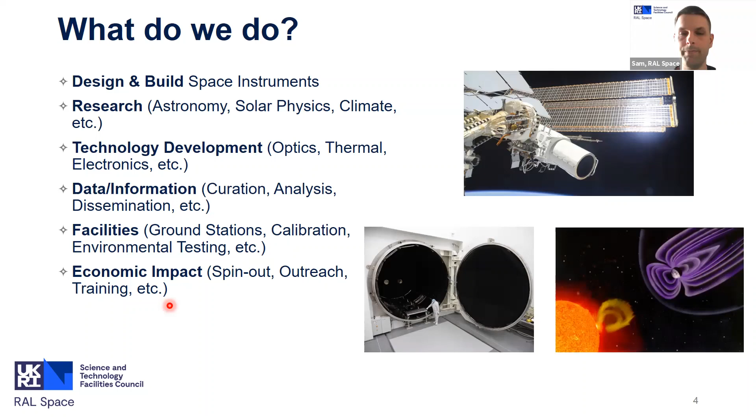Before I move on, I mentioned a few slides ago that we're currently building the National Satellite Test Facility, or the NSTF, so I thought it was worth adding a slide here to give a bit of context. It's a £105 million government investment that aims to provide the UK space industry with a one-stop shop for the complete environmental testing of spacecraft.

So this image, I think, is from earlier this year, of the building as it looks at the moment—this is the big new thermal test chamber that's just been added. I'll talk a bit more about that shortly, but really what this facility does is complement our existing facilities: larger scale thermal, vibration and shock test facilities, a brand new acoustic test facility, EMC facilities, antenna measurement, and also mass property measurement.

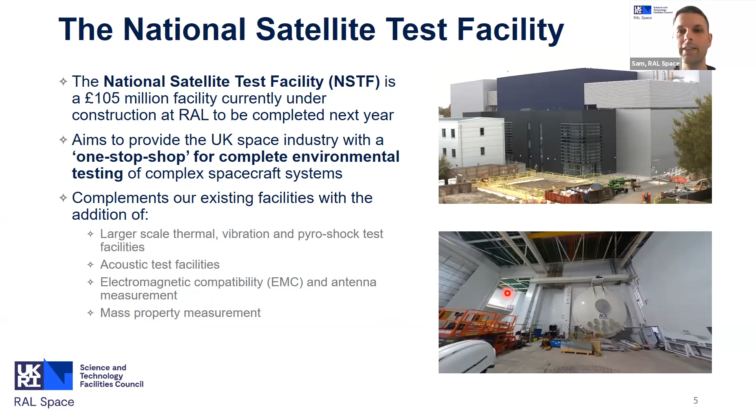So I'm going to talk a bit more about this later on, but just to introduce the NSTF and the fact that it's a really exciting time to be involved in the space industry in the UK.

So yeah, let's talk about testing then. Before we get onto the specifics, it's worth clarifying why this is important and why we care about testing. The key to understanding that is to consider the space environment.

It's probably quite an obvious statement, but without the Earth's atmosphere, we've got to withstand an incredibly hazardous environment in space. This obviously depends on the exact mission, the exact orbit, and the environment it's going to work in, but typically it has to be designed to withstand large mechanical loads—things like vibrations, acoustics, mechanical shocks.

And extremes of hot and cold temperatures. If we think about the International Space Station, which orbits the Earth roughly every 90 minutes, throughout its lifetime it experiences a series of incredibly sharp extremes of hot and cold that it's got to withstand.

And then there's a few other areas: intense radiation, microgravity, space debris. These are maybe things we wouldn't specifically test for in our big facilities, but we've got to make sure we design our spacecraft with these kinds of restrictions in mind. As engineers, our main concern is ensuring that everything we design and build is going to be able to both survive and, more importantly, operate to the required performance throughout the orbital lifetime.

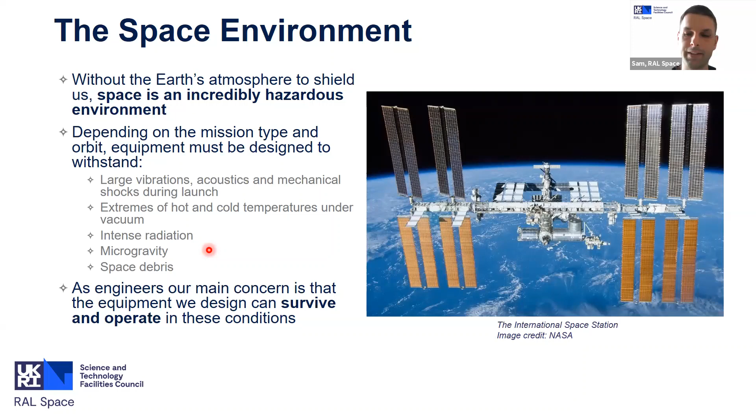To an extent, we can do this through computational models. We use these models to assess the environmental conditions and analyze within those conditions to get an idea of what performance we're going to see. An example here are some thermal models. These three were built using ESATAN-TMS, and this one was built using Systema Thermica, which is typical thermal engineering analysis software for space. These kinds of models give us an idea of what temperatures we're going to expect with the mission we're designing for.

But a really key point is that these models aren't perfect. There's going to be errors in them because there are certain things we don't know, we can't quantify, and of course there's an element of human error. Even if we've got a good idea of the temperatures based on these models, we've still got to check that the design, once it all comes together, is going to stay in one piece as it goes through those temperature extremes.

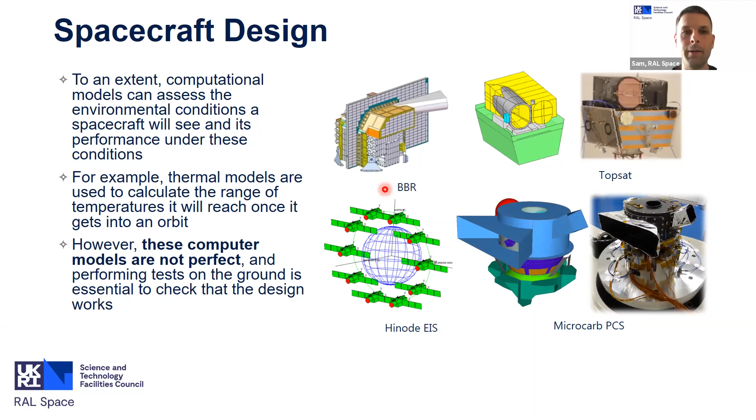This really emphasizes the importance of testing on the ground. Our challenge is to simulate that environment as realistically as possible, which is why test facility design is such a big industry. We start early in a project lifetime by building and testing a prototype model. If this passes successfully, that gives us confidence to move on and build the flight model. Sometimes we take lessons learned from that preliminary prototype testing to implement within the flight model, and then with the flight model we again repeat the tests to confirm suitability.

A key mantra we work to is once the hardware is in space, we can't fix it. So it's much better for us to fail a test on the ground first and understand what's gone wrong prior to sending it into space and it failing there, because once it gets there, in most cases, there's not a lot we can really do about it.

This last point is probably a bit obvious: space missions often cost billions of dollars and have to last years or sometimes even decades in space. So these tests are a really critical part of justifying that and giving us confidence it's going to work. If you think of the James Webb Space Telescope, this is the OTIS optical telescope assembly for James Webb being tested at NASA's Johnson Space Center clean room. JWST is a $10 billion mission, and it just wouldn't be workable if we weren't able to test to this level.

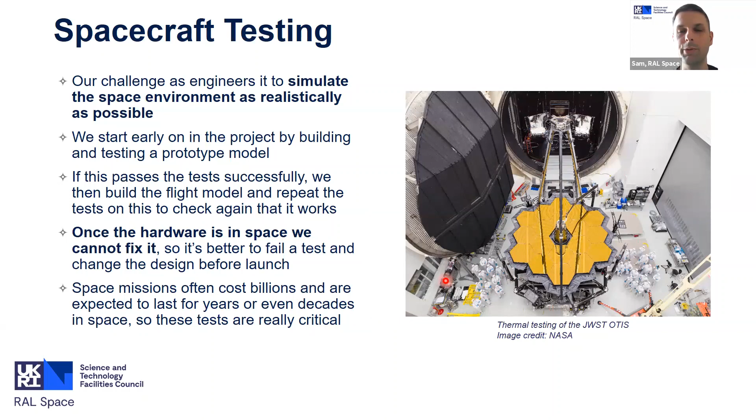One other point, just to emphasize the challenge, we have to do all of our work in clean rooms. Contamination can have a number of detrimental effects on our spacecraft equipment. It can damage optics, and it can reduce the reliability of hardware like mechanisms and electronics. So we have to do all of our work in these ultra clean environments, rooms that continuously circulate the air and scrub out contamination. We have a number of clean room facilities at RAL Space, ISO class 5 being our cleanest areas, but we also have ISO class 6 and ISO class 7.

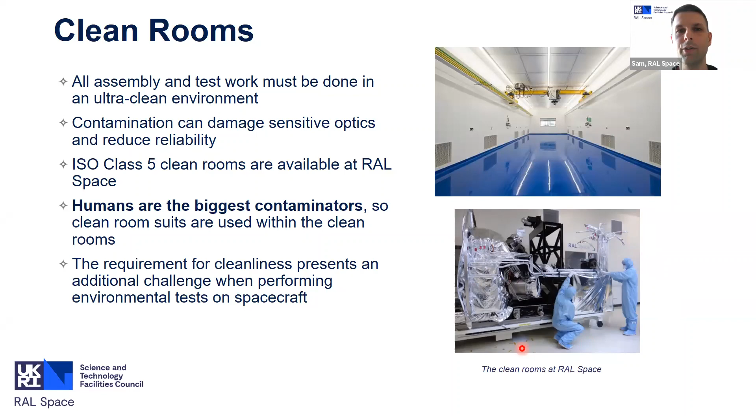The air in these rooms is thousands of times cleaner than the air we're currently breathing, so they do a really good job of scrubbing out contamination. But we, of course, as humans are the biggest contaminators, so we have to do all of our work in these clean room suits. This requirement for cleanliness presents an additional challenge. Particularly with thermal testing, we've got to make sure it's all being done in a clean environment and we're not making our spacecraft dirty in the process.

Okay, so let's move on to some testing. I'm going to start by talking about thermal testing, which, as a thermal engineer, is the area I'm most knowledgeable about. We've got a range of thermal vacuum chambers in RAL Space, ranging from the very small all the way up to this 7-meter diameter chamber, which is the one we're building as part of the NSTF at the moment, which we saw an image of a few slides back. This chamber we can see here is a 5-meter chamber. We've actually got 2 of them in R100.

There are really two types of tests that we would do in these chambers. The first is thermal vacuum testing, where we thermally cycle our hardware between a range of temperatures that we calculate based on our analyses. This gives us confidence that it can survive and operate across those temperature extremes over a number of different cycles. The second, I would argue, is a bit more interesting.

It's called thermal balance testing. The purpose of this test is that we allow our hardware to settle on a steady state condition. We do this for a number of cases and compare the data from our test with what our thermal model has predicted. If we thermal analysts have done our jobs well, we don't have to make many changes. If not, we have to make several changes to our model. The key thing is this test tells us that, and lets us improve and prove our thermal analysis predictions for the actual flight itself.

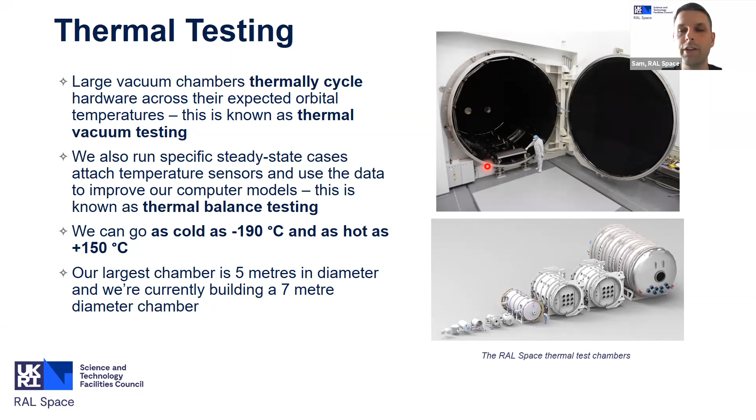But every test is very different according to the mission, and these tests are long and can sometimes last for months. On these next couple of slides I've got a few examples of some slightly more interesting tests to show you.

Moving on, we've also got a slide about some cryogenic testing we did years ago for the mid-infrared instrument on JWST. In these circumstances, the RAL panels can only cool to about 80 or 90 Kelvin, so we had to develop an additional facility that could slide inside the thermal test chamber and allow us to cool beyond that. We did this using a set of cryogenic coolers, which cooled this shroud to less than 40, 35 Kelvin. We also had areas of the instrument that had to be cooled down to 6 Kelvin, so we had to design a bespoke solution for this.

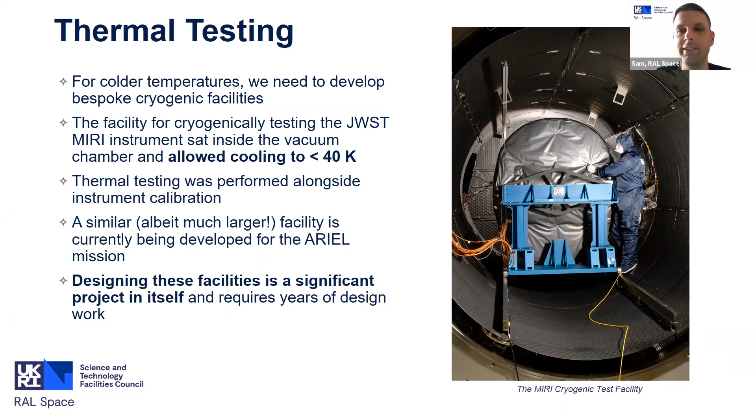So let's move on to mechanical testing, starting with vibration testing. This uses something we call a shaker table to vibrate the hardware and simulate the incredibly violent vibrations we'd see on a typical rocket launch. We can see the panel here that it's mounted to - I'll show you a video of this in a moment. This panel will move horizontally, and we've also got a panel just behind here, which you can't quite see in the picture, that will move vertically - we mount the hardware to that for the vertical axes.

And yeah, we'll mount accelerometers to it to monitor the response while it's shaking, and that will detect any anomalies that might be caused by the vibrations.

To give you an idea of how powerful this is, the table at RAL, the one we're looking at now, can simulate accelerations as high as 140 Gs. Obviously, the heavier the item you put on it, the lower that figure is. For most hardware, we test between 10 or 20 Gs, depending on the exact launch specification, and also with random vibrations up to 2 kilohertz.

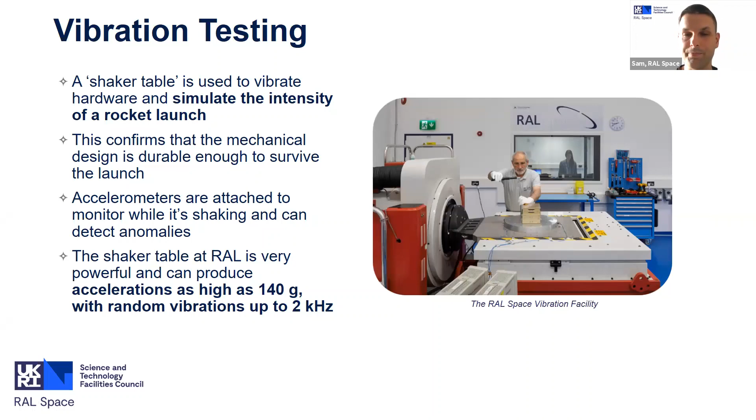So when we see that in action - this is the bit that might be a bit noisy, so hopefully you can hear that - you'll see this in action now. This was vibration testing for the Spire instrument that we built for the Herschel mission. It's a bit of an older mission, this, a bit of an older video, but I think it really emphasizes the power of this facility.

I suppose we never normally see really aggressive failures, only very subtle changes.

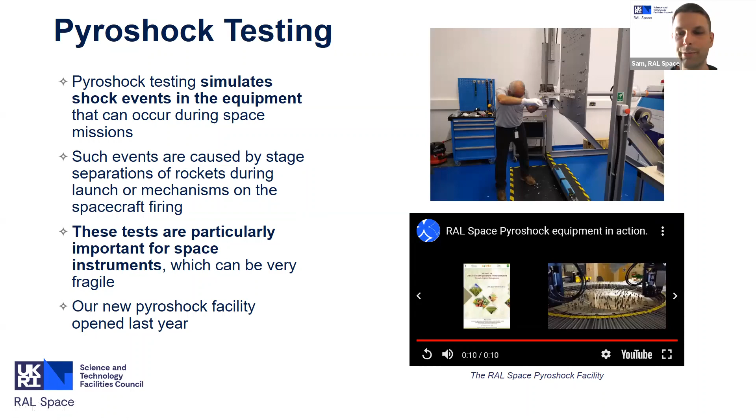And I'm just going to finish by talking about a few other types of tests. These are facilities that we're currently developing as part of the NSTF - I kind of briefly mentioned them before. The first one is acoustic testing.

You might ask why that's important. The reason is we need to make sure that, particularly for science missions with something like a magnetometer measuring magnetic fields, the electromagnetic interference from your spacecraft isn't disrupting those scientific measurements, or at least that you're able to characterize the magnetic field being generated by the spacecraft. That's what these facilities are there to do.

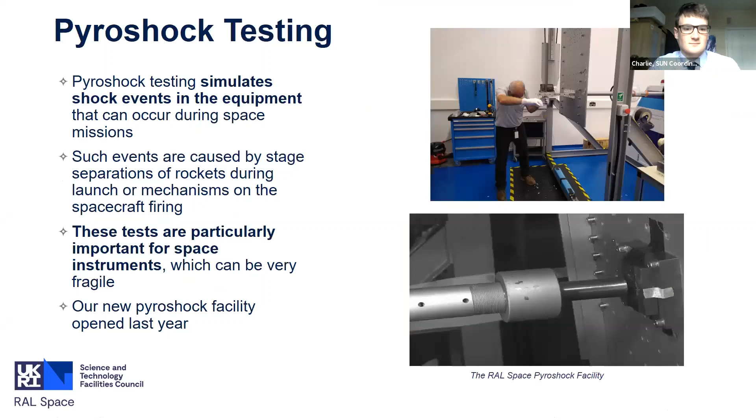What I can maybe do is just play it with the sound muted. I debated whether to include the sound, but I thought at least you get an idea of how noisy it is, and what you'd hear if you were in the room with it. What we're seeing here is vibration testing of the Spire instruments, part of the Herschel mission. This is quite an old video, as you can maybe tell. What we have is a random vibration cycle with the frequency gradually building up. We can see the accelerometers on the hardware itself measuring its performance during the test.

Another point I made was that the mechanical engineer at this point is looking quite closely at this area of the instrument. It's a bit before my time, this project, but I suspect he was particularly worried about that interface in terms of his mechanical analyses, and maybe wanted to monitor it closely. The last point I made was about the kind of failure modes we might get during these tests. Sometimes when we show this facility to people in person, they'll ask, do you get things flying off the hardware and shooting across the room? It's never that exciting, or something's gone very badly wrong with the mechanical if it is that exciting.

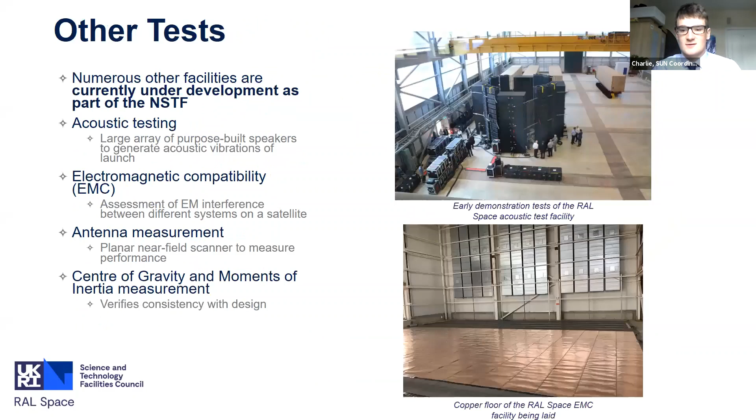So if it's possible, could you give us more of an overview of your role itself at RAL Space, and a look at your day-to-day, pre and post-COVID, if it's changed during that as well?

Yeah, absolutely. It has changed post-COVID because there's a lot more homeworking now, but throughout COVID we're still doing these big test campaigns, and we're still on site as needed to build our instruments and do the testing that we need.

So yeah, I'm a thermal engineer. I guess there's bits of this that I covered during the talk, but my role is to make sure that what we send into space is going to be able to both survive thermally and then also meet the kind of performance requirements given to us by people like the systems engineers and the mission scientists. That could be something like maintaining a certain level of thermal stability on a detector.

It could be achieving a certain temperature that's needed. I showed the MIRI instrument before, where we have a requirement to keep the detectors as cold as 6 Kelvin. So that's a kind of typical requirement that I would have to deal with.

It's a very collaborative process. I'd say thermal, out of many of the other engineering disciplines, requires a lot of awareness of other disciplines. It's kind of a systems role in some way - we have to have awareness of things like electronics dissipation and power management, and obviously mechanical design, like how feasible it is to mount thermal hardware, radiators, multi-layer insulation, and also things like optics. So it's certainly very varied.

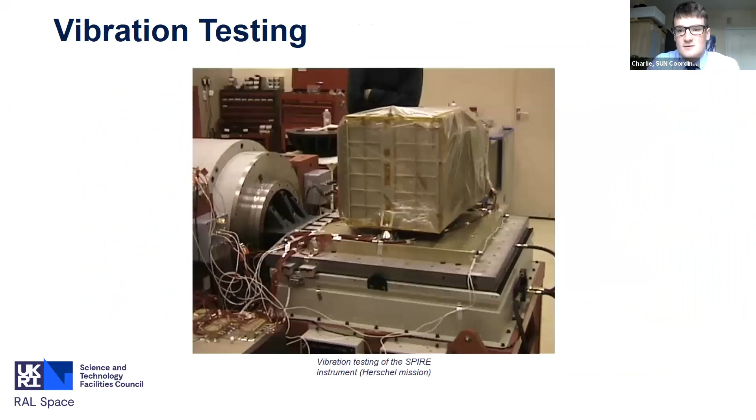That's great. So we can take some questions from the chat now. We have one on software - what software do you use to make models and test both static and dynamic loading experienced through launch? Also, what software do you use to study thermal and radiation environments?

So there's a few questions there. I'll start with the thermal stuff first. We tend to use a piece of software called ESATAN TMS, which stands for European Space Agency Thermal Analysis Network, and it's the kind of ESA standard for thermal analysis of spacecraft.

We also occasionally use a piece of software called Systema Thermica, which is an Airbus software. It's a finite difference software, so at least when I started using it, it was a bit different to what I had got used to when studying at university. But they allow you to analyze in a range of different orbits, and they're certainly a lot more sophisticated now than they were 10 years ago.

In terms of mechanical analysis, different organizations use different software. We tend to use finite element analysis software, such as ANSYS and NASTRAN. NASTRAN, I think, is more space-focused, but we have a team of mechanical engineers that do that analysis, and they sometimes use that software for things like thermoelastic analysis. So we have to work closely with them, feeding them the temperatures we get from our analyses for their thermoelastic work.